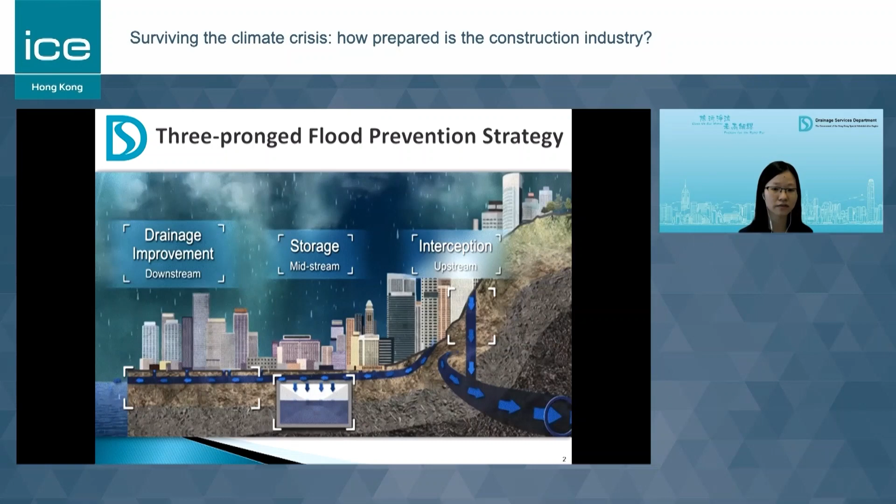However, climate is changing, so the mean sea level is rising, and there will be more extreme rainfall and more serious storm surge during the passage of typhoons due to climate change. All this will definitely increase the flood risk to us, being a coastal city, and especially for low-lying areas. So the question is, how are we going to tackle it?

Apart from the traditional structural engineering solutions, we are now introducing resilient solutions to address the residual flood risk. Here are some examples of resilience measures, such as the installation of demountable flood barriers or bringing up the E&M equipment to a higher level. In case of flooding, these measures can minimize the economic loss and maintain the normal functioning of the equipment. Compared to structural engineering solutions, resilience measures are sometimes more flexible and cost-effective.

As for new development areas, the concept of floodable areas is worth mentioning. Taking Hung Shui Kiu new development area as an example, recreational areas such as water ponds, sports grounds, and green areas can serve as temporary storm water storage areas. This will greatly relieve the stress on our drainage system during extreme rainstorms.

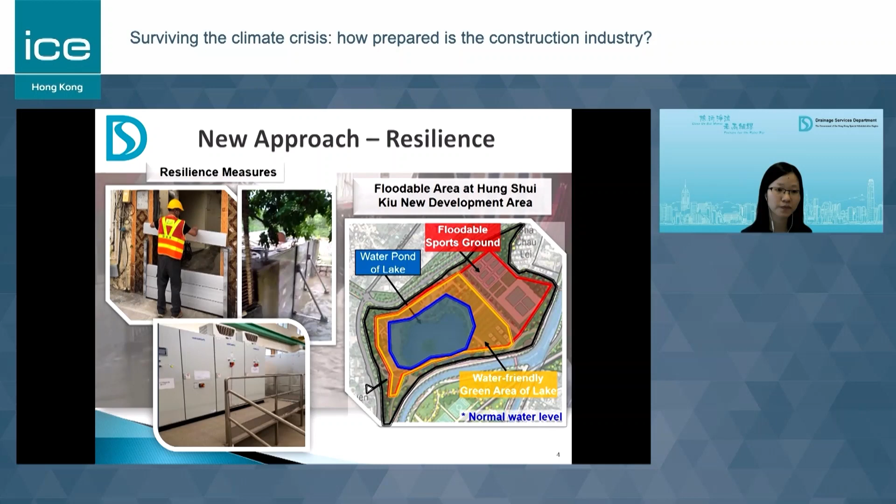Recently, the government has identified 26 coastal, low-lying, or windy residential areas with flooding risk. For locations under threat of storm surge during the passage of tropical cyclones, an early warning system has been set up to reduce the impact on nearby residents. When the Hong Kong Observatory predicts that the sea level at Tai O will exceed the preset alert level, they will alert us by sending a warning message. We will then deploy emergency response teams to set up relevant resilience measures to relieve the flooding impact.

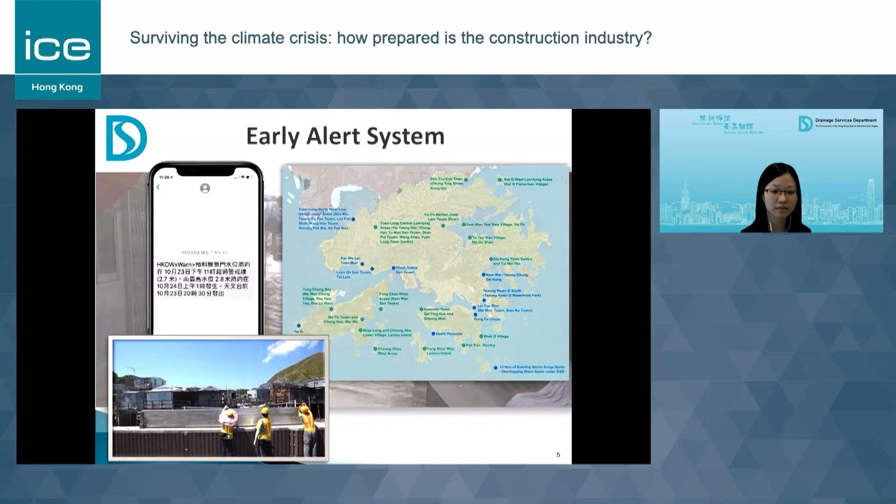One of the major causes of flooding is the blockage of drains by silt, debris, or rubbish, etc. So in cooperation with the Hong Kong Observatory, we can have rainfall forecasting on a district basis. This can help us carry out just-in-time clearance for drains at vulnerable locations before heavy rainstorms. We also make use of the latest technology, employing silt-clearing robots and the development of a hydrometric information system to provide us real-time information on rainfall and sea level.

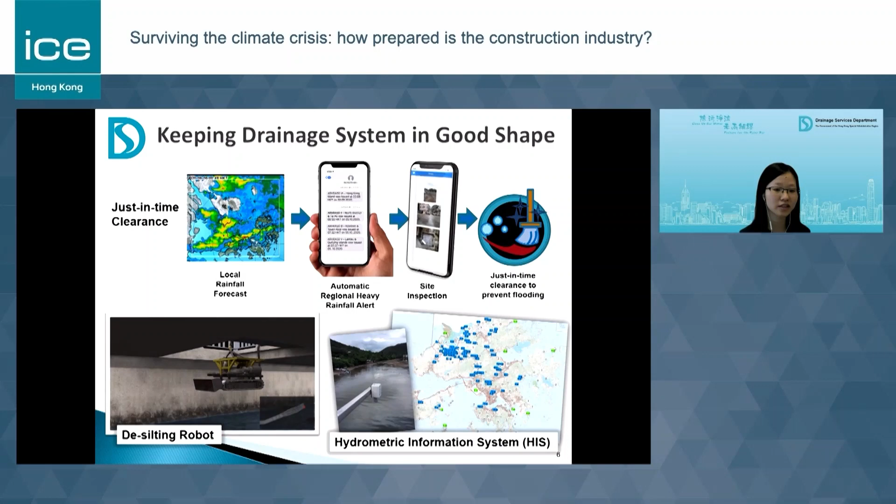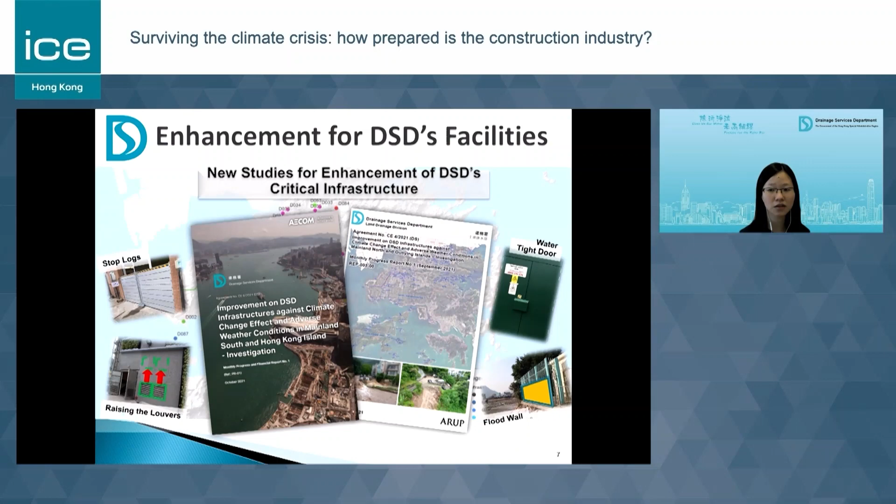To ensure the proper functioning of our facilities under extreme weather events, we are undertaking consultancies to develop schemes on enhancing the resilience of our critical infrastructure. We have also started a strategic planning study with the aim of developing a new flood management strategy to address the flood risk brought by climate change. We understand that we could not just rely on resilience methods, nor should we just count on structural engineering solutions. We have to do both, and each should complement the other.

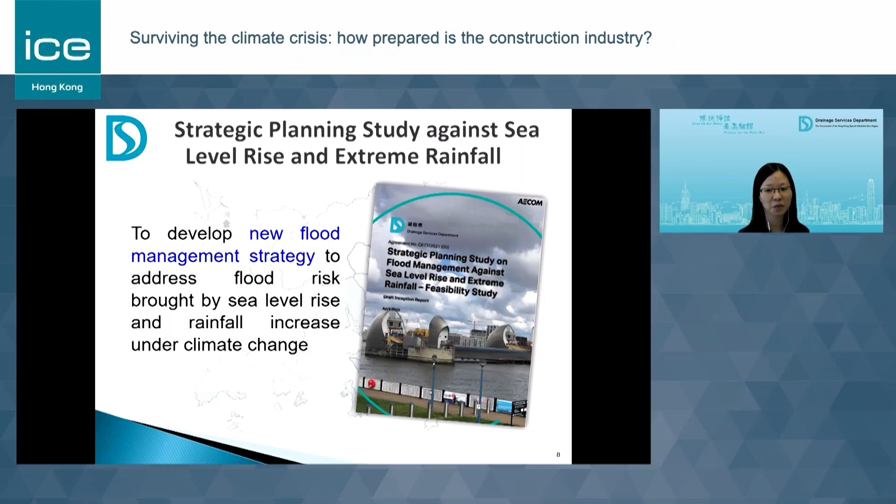Finally, I would like to say that support from the general public, as well as every one of you, is the key to our success. With continuous effort from all of us, I think we will be able to build a better Hong Kong for future generations. Thank you.

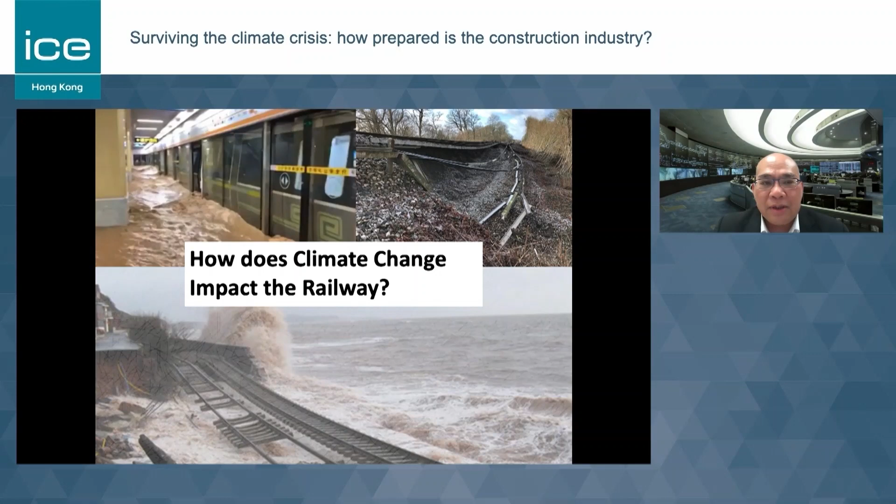If you look at this photo, you realize how climate could affect the railway in terms of safety, flooding, and derailment risk. MTR is not alone in this challenge; everyone will have to face extreme weather, changing rainfall patterns, and ever-rising temperatures. We have to do all the planning well ahead, adopting a life cycle cost approach to identify potential opportunities, and consistently update our design manual to cope with the latest adverse weather changes. We also regularly carry out extreme weather and climate change impact studies to see how our infrastructure and operational readiness have to be uplifted to face these challenges, so we can predict and prevent potential events that threaten railway operation safety.

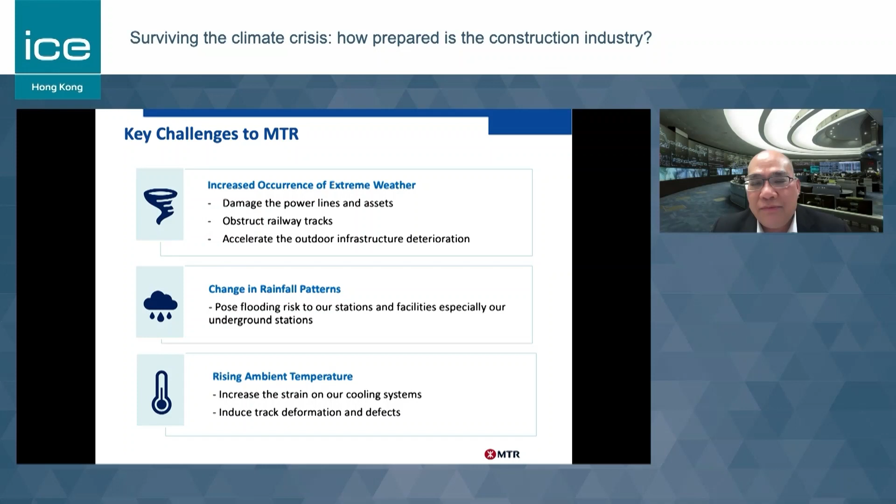For our climate change initiatives, I would partition them into 4 areas, including climate adaptation and resilience, and the green part. Everyone has great interest in flooding risk to the railway. We design based on a 1 in 200 year standard, and our station design always has a step of at least 450 mm, which everyone will see when going to the stations.

In case of heavy rainfall with early alarm, we will erect flood boards so water doesn't get into the stations, providing 1.2 meter high level flood boards that could withstand even further extreme weather attacks. We also provide floodgates in tunnels to block water in case it gets into the tunnel, or in case of breakage of the tunnel wall leading to leakage.

We also carry out slope maintenance, and for emergency readiness, it is important to take a proactive approach to look into how rainfall actually develops and the areas that could attack underground stations, so we can evacuate the station early enough before there is any potential fatal risk to passengers.

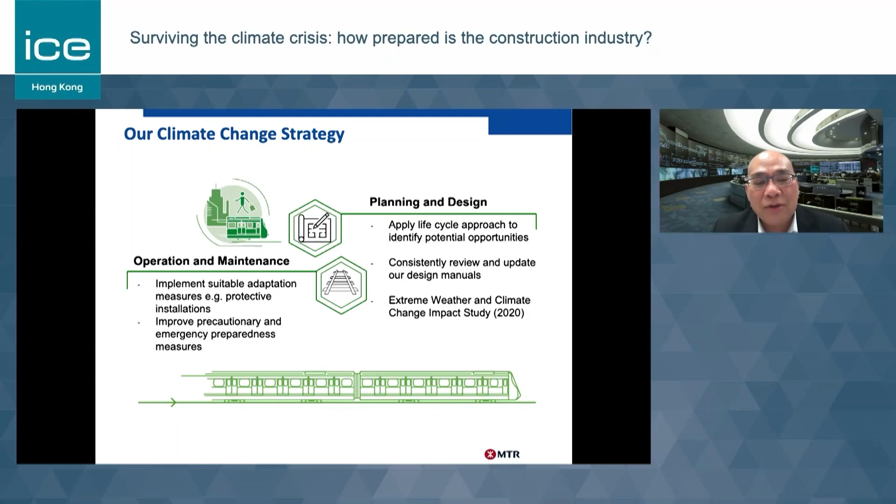On precautionary measures, we apply technologies like tree management, seeing how trees could fall or tilt under a big typhoon, flooding monitoring systems throughout, and drainage system inspections. One example is adopting LiDAR technology mounted on light rail vehicles so the vehicle can survey the area and see how tree branches develop, how wind blows the branches, and the potential risk of trees falling onto the running railway.

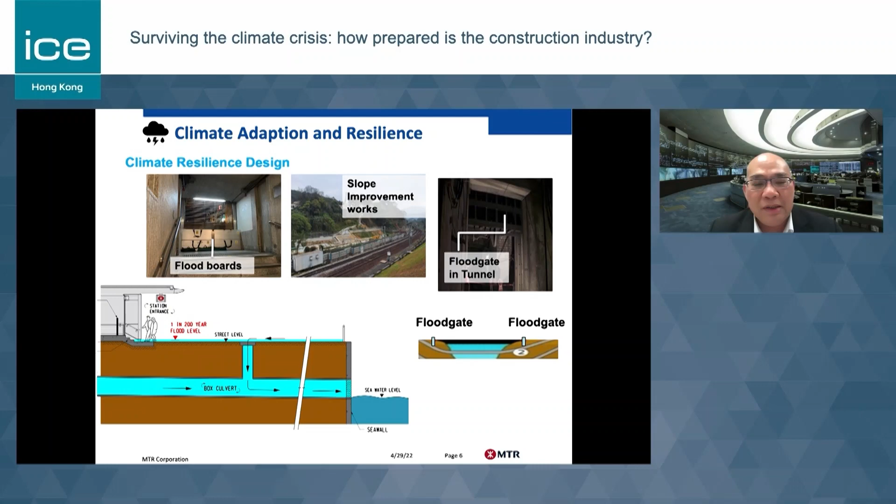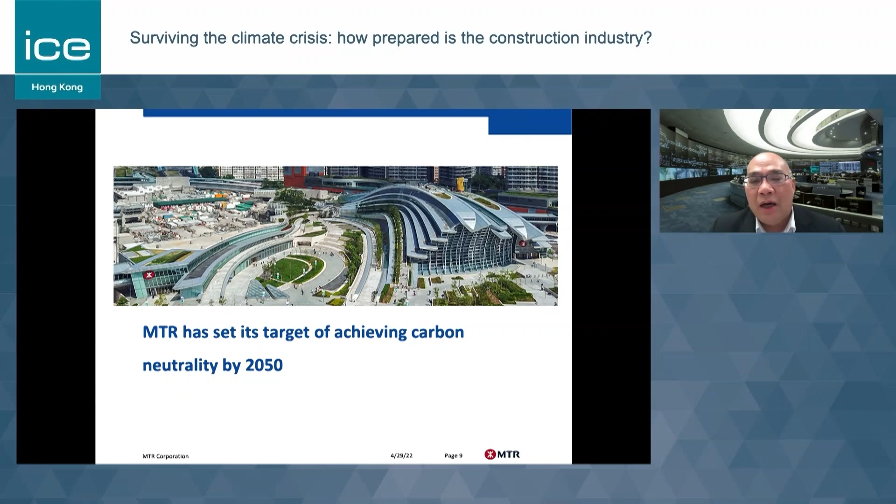For the green part, we commit to a target of achieving carbon neutrality by 2050. Some actions include replacing old fittings, a big project almost finished within 1 or 2 years, saving 30% of energy compared with old technologies. We use VVVF technologies, reducing 20,000 tons of CO2, and LED lighting everywhere.

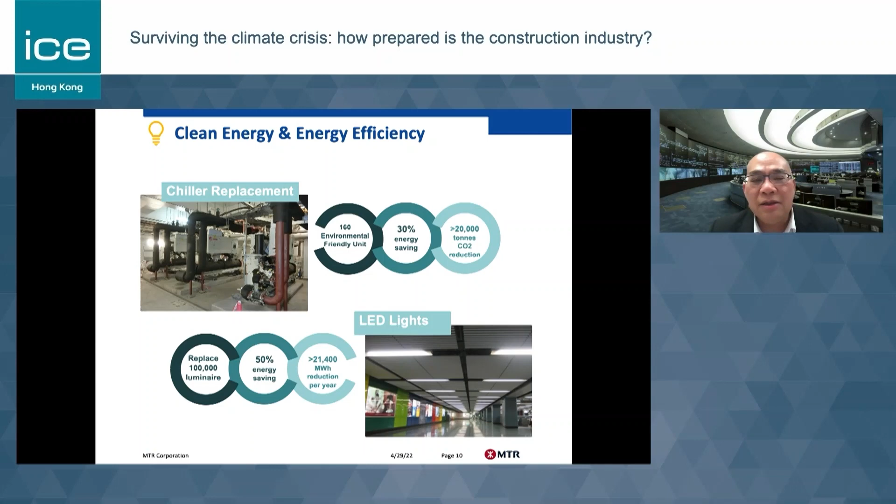Hin Keng station is one of the model stations where we apply a lot of green technology, and it is one of the stations that won the BREEAM certificate, which is the first in Asia.

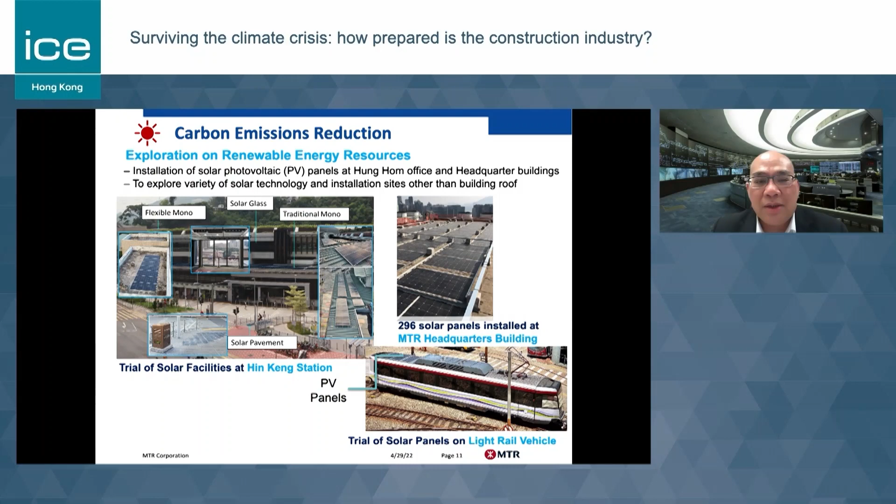And for the light rail vehicle, we also try solar panels on the roof. And for the bus, instead of using diesel, we're exploring using a battery, or maybe in the future looking for a hydrogen bus as well.

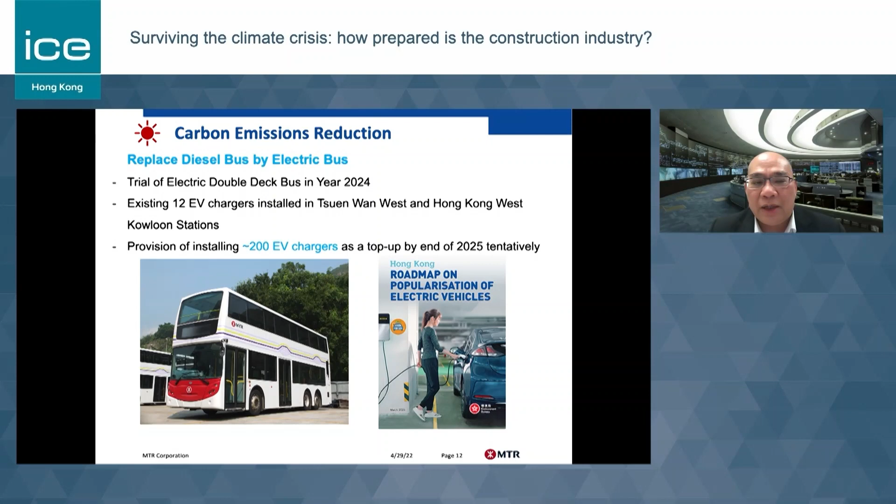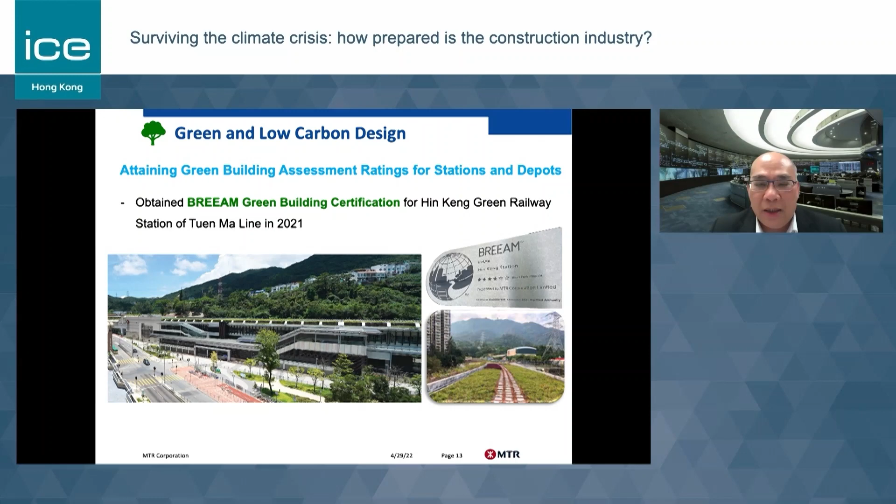As I mentioned just now, the BREEAM Green Building Certificate was actually awarded to us, and that is the first in railway in Asia. In future, we are going to tackle how to make our station greener. This is one of the examples that we will try to build a station greener than before.

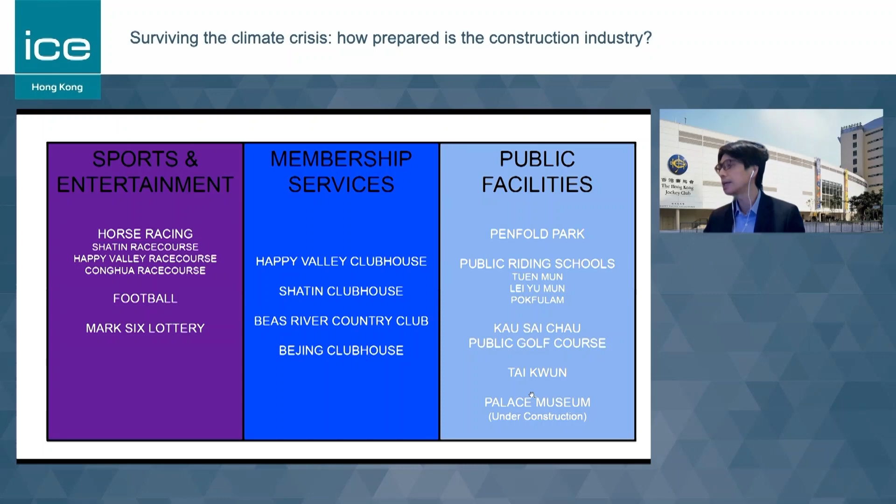Something you may not know is that we are also providing hospitality service and membership services. We have clubhouses in Happy Valley, Shatin, Beas River, and Beijing. We also design, build, and operate facilities for Hong Kong society as well, including Penfold Park, public riding schools, Kau Sai Chau Golf Course, and also Tai Kwun, and the Palace Museum is under construction.

So this is the one I use to explain to my colleagues what the climate change impacts are to the club. In 2018, during Typhoon Mangkhut, we had to cancel our race event because of the extreme weather condition. And when climate change comes, that will become more and more frequent. So not even typhoon, but also hot temperature and high humidity will affect the horse performance as well. Upstream, that will affect our supply of horse feed and horse materials, and also the catering services. What we eat, the food supply, will also be affected. And climate change will affect our water supply and also our transportation.

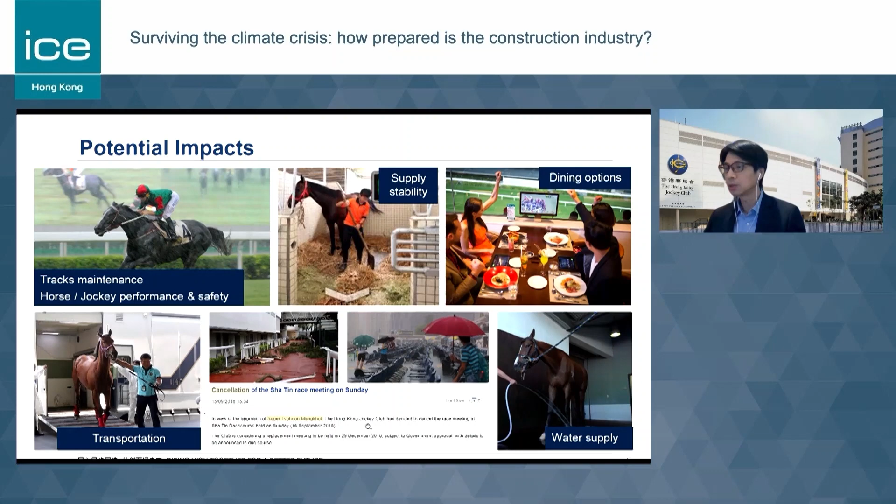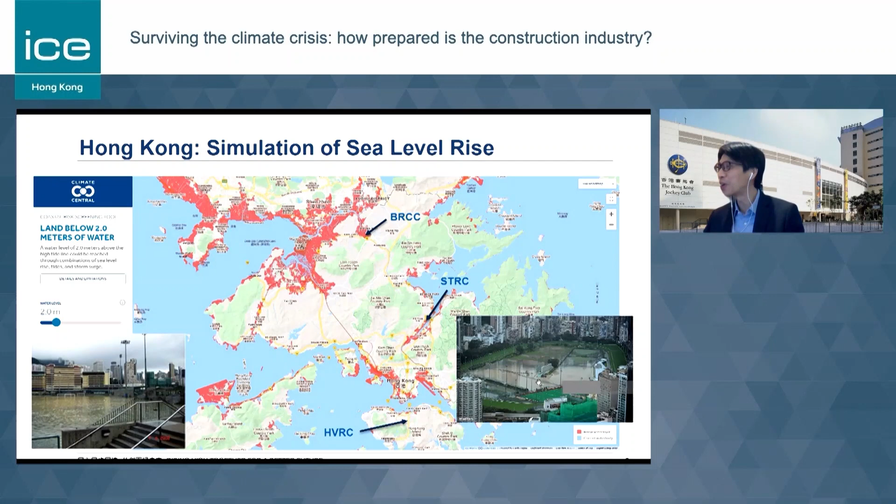So I showed this to our colleagues and to you in the club: with 2 meters sea level rise, the Happy Valley Racecourse, Sha Tin, and Beas River, our main operations, will be underwater. This is 2 meters only, not taking into account storm surge and extreme typhoon conditions. And Joyce, because of DSD's help, Happy Valley has the underground stormwater storage tank, so the situation may be better. That was an old photo we took of the flooding in Happy Valley.

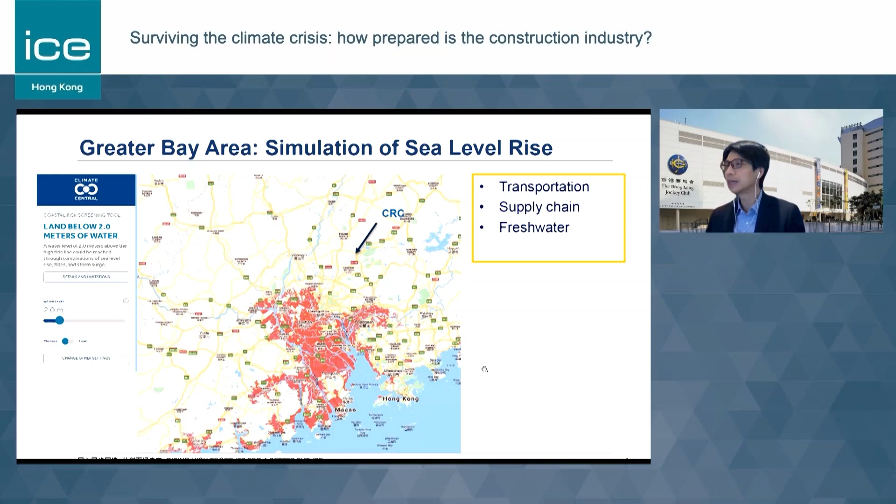So not just in Hong Kong, but taking a step back and looking at the whole Pearl River Delta, the Greater Bay Area, our operation in Conghua, our supply chain will be affected, and our transportation to Conghua will be blocked as well. So these are the things that we may have to look at. And this is not my own idea — this is the wording from our CEO, that climate change is an obligation, not a choice. So that's what we are doing on climate change.

I want to share with you, I think this is a concept everyone is using, but this is the way we are looking at it. So we have 5 areas to look at.

Our own operation, how to reduce our scope 1 and scope 2, but we also have to look at our supply chain, our scope 3, and our material used for projects and constructions.

Another one, some of the speakers have touched on as well, is adaptation and resilience. How can we protect our operations, buildings, and facilities from flooding and adverse climate conditions.

And the other thing is the offset. Even if we do the other areas, we still have some carbon that we may not be able to reduce. Then we'll have to look at an offset strategy.

But more important is the final one, change management. If we are willing to change our behavior, some of the things we do not have to do. For example, if we are willing to turn up the temperature of our air conditioning by 2 degrees, then we don't have to do a lot of retrofitting and other things.

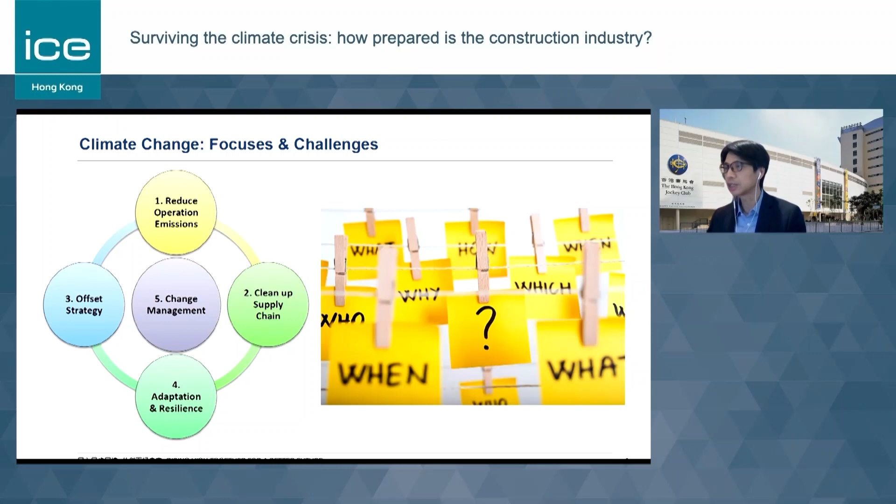And this is not the first one—we have done that in Kau Sai Chau. We have our solar ferry, solar golf cart, and we also collect rainwater for irrigation. In Kau Sai Chau we have, the only desalination plant in Hong Kong right now, and we are also applying zero wastewater discharge and water harvesting concepts at our race course in Conghua.

So doing things in our own operation is one thing. The club's purpose is also to act continuously for the betterment of society.

So we work with NGOs to provide training and upgrade NGO facilities, like greening the buildings, etc. We are also training up young people on concepts like climate change and collecting ideas for climate reductions. And we also sponsor NGOs in installing solar panels and other things.

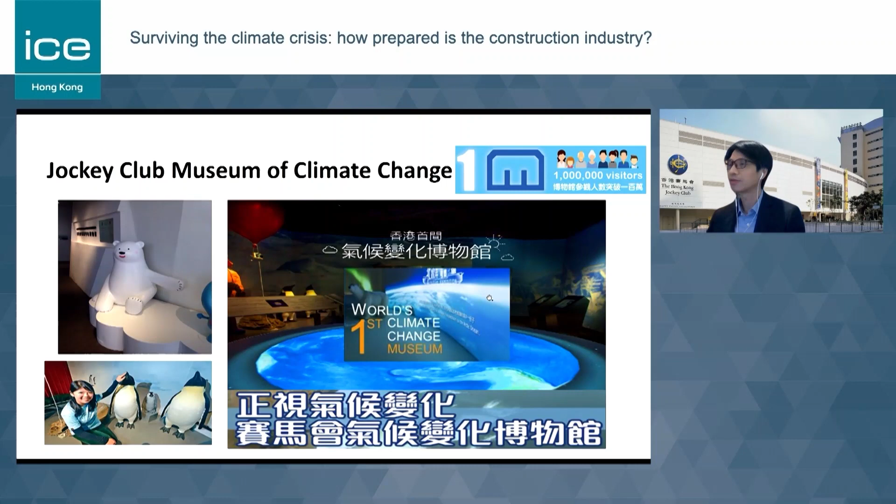So I'll stop here, and then maybe we can discuss—if you have any questions we can share and discuss.